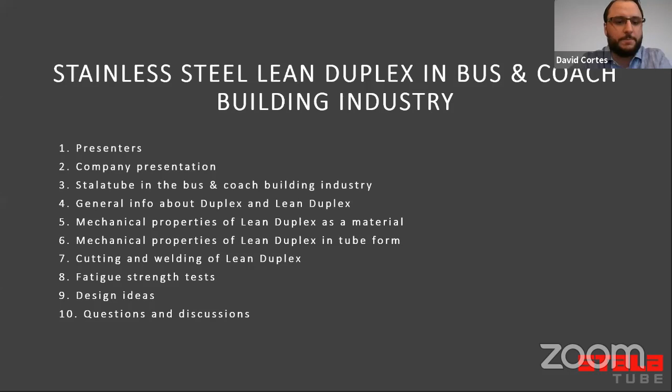So I have been recently appointed export manager in Stalatube, and I have 8 years of commercial experience in the transport industry. My colleague Lari Brask is our welding material expert here in Stalatube. He has also been working in Stalatube for many years. Markus Härkönen is going to be talking about the designing, and he has also experience here in Stalatube for a couple of years.

So Stalatube in short, here you can see where we are placed in the world. We are a company from Finland. We started in '72, actually making kitchen desks in stainless steel, and then this company started to make these square tubes for these kitchens, and then they separated the company as Stalatube itself because the demand started to go up, and they made this strategic decision.

During all this time, we have had for a very long time a commercial office in Holland. And nowadays we have expanded; we have been in USA and in India since 2009. So we have Tushar Patil in India, who can also talk with you about any of your questions directly there in your country. We also have a commercial office in Germany, and we are actually opening a stock in China this year, so hopefully it will be operative soon.

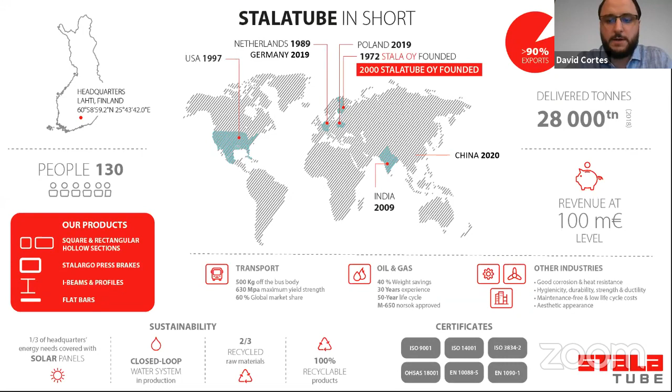These are our main products. So we have mostly square and rectangular tubes in various sizes. We actually have the widest range of sizes in the industry. In stainless steel, everything. And then we have ferritic and duplex tubes, which are the ones that we sell mostly in the transport industry.

We do also laser cut components, as you will see, and we can tailor our products to 1 millimeter precision. So we usually do all kinds of special projects for our customers, and that's where our strength is, mostly in special projects and also in some bulk products, but especially the tailored ones. We have I-beams, we have also U profiles, L profiles. We do sell some sheets in ferritic and duplex materials also. So feel free to make any requests.

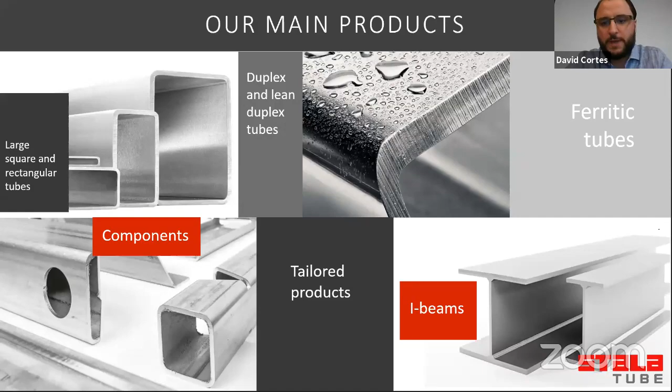Let me show you some of our references in the bus industry. We are the 3rd steel rectangular pipe manufacturer in the world, but in terms of volume, we are the 1st one in the transport industry. So that's very relevant. We are working with the biggest customers. Also with duplex. So companies like Volvo, Scania, VDL, or Solaris are using duplex.

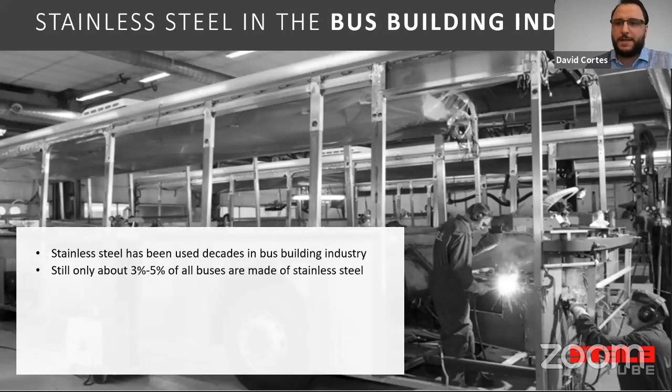Let me talk some history about stainless steel. It has been used for decades in the bus building industry. Many don't know this. Volvo was already in the 80s using stainless steel in their buses, but still only about 3 to 5% of all buses are made of stainless steel. So there is a lot of space to grow that way.

Nowadays, it is mainly ferritic EN 1.4003 stainless steel, the one that we use. But in the US, for historical reasons, coach builders are also using 304 austenitic stainless steel. Due to weight savings, high strength Lean Duplex stainless steel is getting more and more popular.

And actually, one of the trends that we are seeing is that customers are coming from using aluminum, looking for weight savings. They are now coming to us to use Duplex in their new projects, and we are seeing results already. So that is one big trend that we are seeing at the moment.

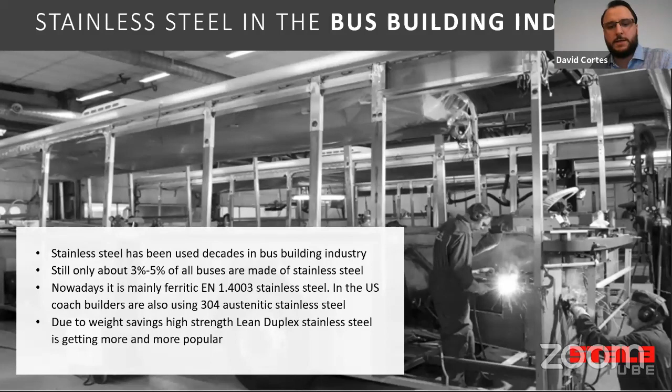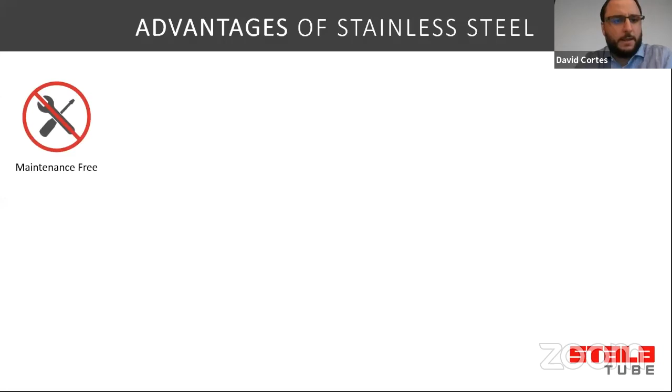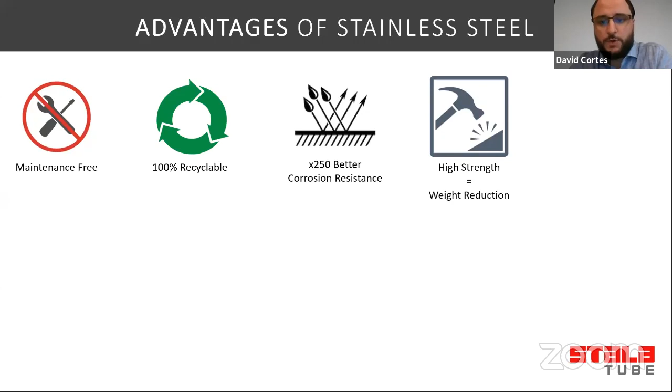Let me talk quickly about the advantages of stainless steel. You maybe know stainless steel as a material, but one of the main reasons is it is 100% recyclable. It has a much better corrosion resistance than carbon steel. It is high strength, which brings opportunity for weight reduction, as well as the capability to use less material in the wall thicknesses. That brings weight reduction.

We can achieve lower life cycle costs by using stainless steel. And it has a really good energy absorption percentage compared to carbon steel. We can do custom-made tubes, and it has great versatility, superior elongation, and a longer-lasting attractive finish without any surface treatments. So those are advantages of the material.

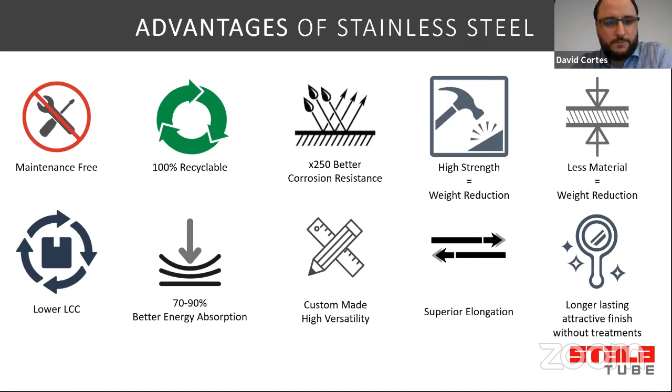Then, the materials that we are using in the transport industry are mostly three, as I mentioned already. So we have austenitic, which is used mostly, as I mentioned, in the US for historical reasons. And honestly, we do not recommend using it. It is expensive due to the high alloy content, and its mechanical properties are not that great compared to other options available. Yield strength, though, is up to 350 megapascals with our Stala 350 material class.

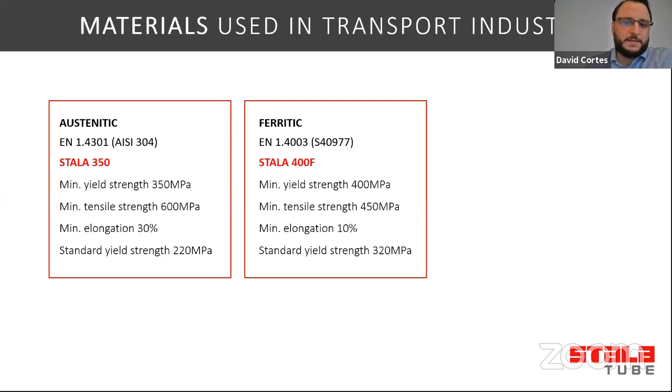So that is there. Ferritic material is the most commonly used stainless steel in the bus construction industry. It has 250 times better corrosion resistance than traditional mild carbon steel. It is cheaper than austenitic, and mechanical properties are pretty good. I mean, the content of nickel is very low, so that also allows us to have a very stable price that doesn't fluctuate as much as it does with austenitic because of the nickel.

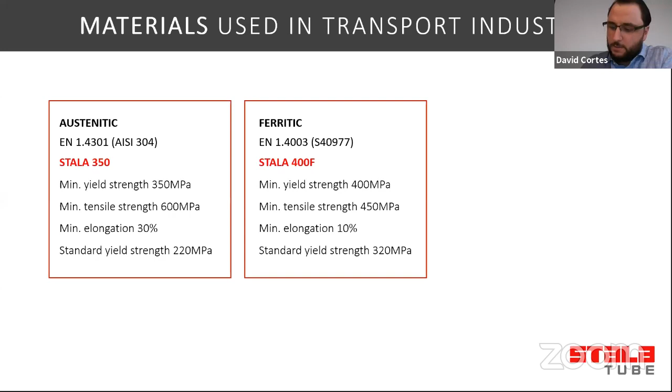Then we do have a yield strength up to 400 megapascals, which is already better than austenitic. So it's cheaper and it has more yield strength. And with our class Stala 400F, we can give you those 400 megapascals.

And then the reason for this webinar is to introduce this Lean Duplex material that we have been marketing already for a while, which is now taking over for new projects. It has excellent mechanical properties. Our customers use it mostly for the side pillars and for heavier beams on the body structure that withstand the highest loads in the bus body.

We can offer up to a 630 megapascal yield strength, which is much bigger than the others, having still a very good elongation, 20%. And it is our class Stala 630D, the product that gives this 630 megapascal. Standard yield strength in all the materials is a bit lower than the one that we offer also in tube form.

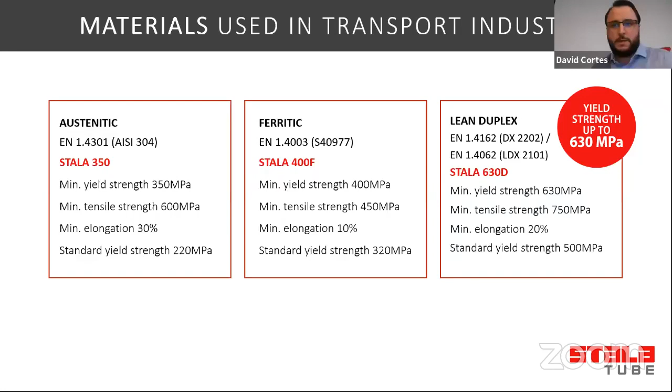And another advantage of the Lean Duplex, because it's a mixture of austenitic and ferritic, it actually also has a smaller content in nickel, which stabilizes the price. So that is also one of the advantages.

Let me show you one component case that we do for Scania. We do this in Europe mostly for factories that they have in Poland and Finland, which are also where we have our own factories. So it is very easy for us to handle logistics. But we are using here duplex stainless steel as well as ferritic. And we are doing tailored solutions, laser cut, ready-made and packed components for final assembly.

So by doing this, we are making it very easy for the final assembly employees in our customers' factories. They don't need such a skilled workforce, and it's very practical for them. So in their case, it works very well, and we are here mostly in Europe, price competitive. Maybe in India this way we are not so much, of course, coming from Europe, but you can see here an example of what we are doing with other customers.

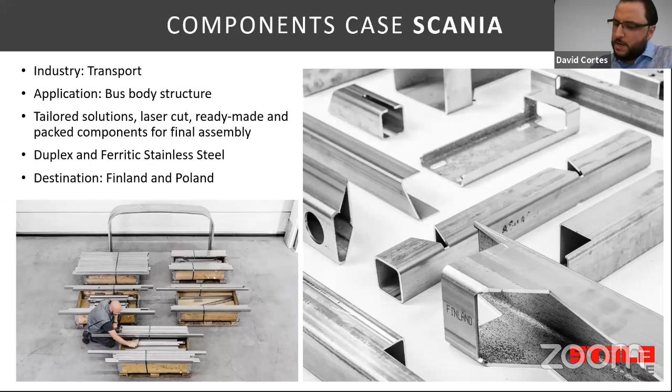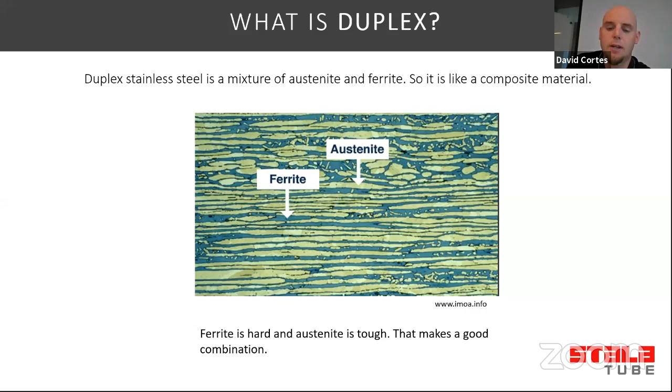And something about the history of duplex, how did this start? Duplex stainless steel has been used almost 100 years. In the beginning, they were used mainly in castings. The reason for that was to avoid hot cracking, because the standard material was fully austenitic stainless steel, which is very prone to hot cracking. The main application was the oil and gas industry, typically valves. Different kinds of valve bodies were cast products.

Using duplex in other products than castings became more common in the 1970s when the steel refining process had improved enough. And the first commonly recognized duplex grade was established. That grade was duplex 2205. It is still the most common duplex grade in the world, and that 2205 is kind of the standard duplex still today. After that, more corrosion resistant duplex grades called super duplex grades have been developed.

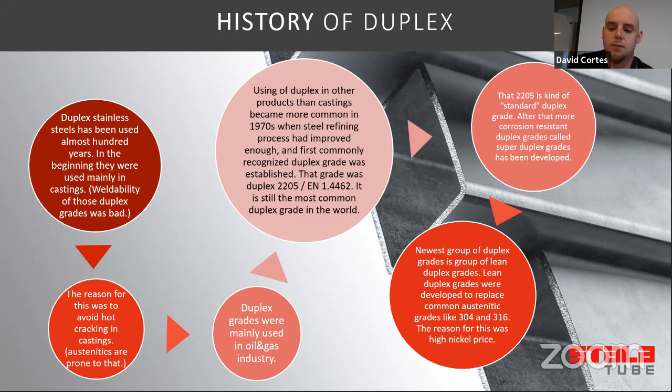Now the newest group of duplex grades is called Lean Duplex grades. These were developed to replace common austenitic grades like 304 and 316. The reason for that was the high nickel price around 2007-8, when the nickel price was sky high. The problem with the common austenitic grades is this high nickel content, which causes prices to fluctuate. These Lean Duplex grades typically have about 2% nickel, which gives much better price stability.

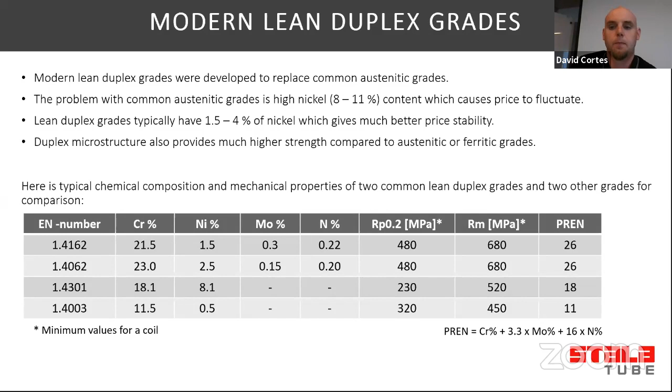And these properties provide excellent resistance in case of crash. So there is a lot of built-in safety factor in case of a rollover accident, for example. This is something that high-strength carbon steels don't have. They typically have very high strength but poor elongation. So in case of crash, there is a risk of cracking.

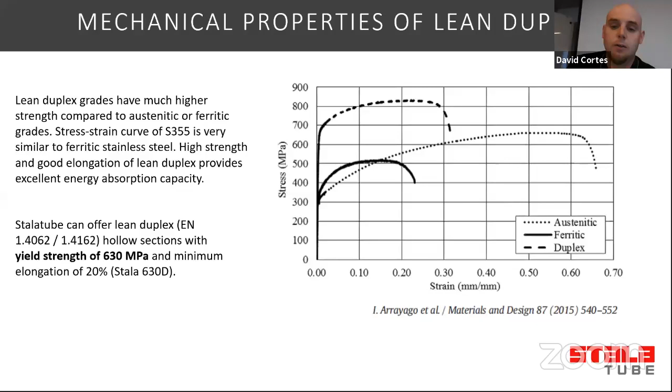Then something about the Lean Duplex hollow sections. So these products offer the possibility to reduce weight compared to ferritic and austenitic stainless steel grades, and this also includes the common carbon steel grades. The corrosion resistance is much better compared to ferritic stainless steel, and this also concerns the austenitic stainless steel. This Lean Duplex has better corrosion resistance than 304.

And this high strength and good elongation makes Lean Duplex an ideal material for rollover structures in a bus body. So that is the main reason why these Lean Duplex grades are being used in bus bodies. And nowadays, the weldability of these modern Lean Duplex grades is also very good, because some of those older duplex grades were very difficult to weld.

And then we have the product range for those duplex hollow sections. The sizes start from 25 by 25 and go up to 100 by 100. And most of those dimensions are available in this high strength class 630D. Custom sizes are also available.

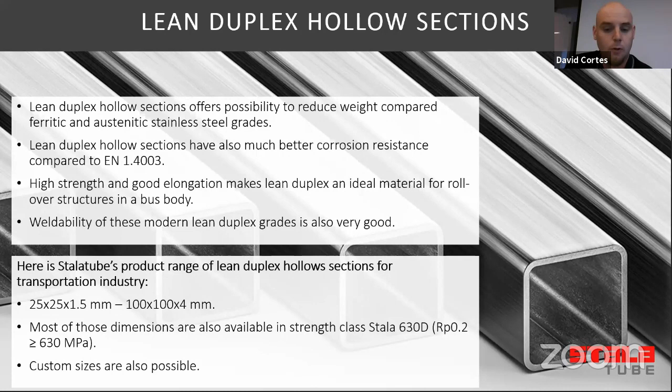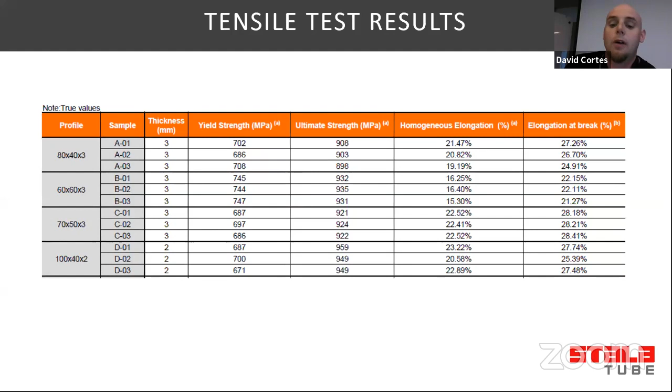Here we have some actual tensile test results for those hollow sections. You can see the profile size on the left-hand side. Typically, as you can see, the yield strength is around 700 megapascals. The ultimate tensile strength is more than 900. And still the homogeneous elongation is about 20%, and the elongation at break is always above 20%, typically about 25%. So this basically means that these can handle a lot of bending, buckling, all kinds of damage before they break.

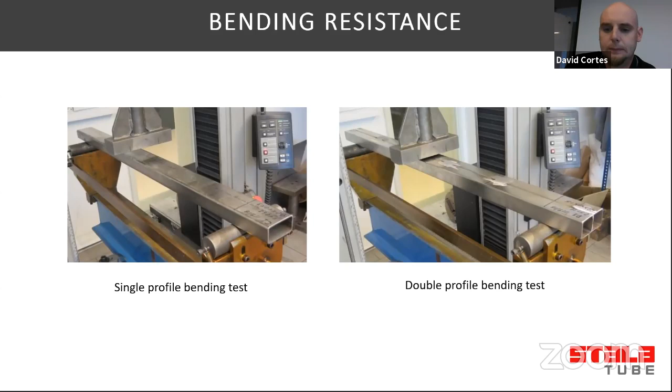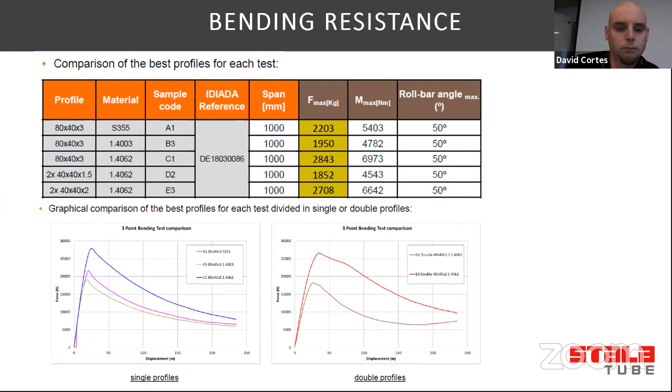Then something about cutting and welding of those Lean Duplex products. Lean Duplex hollow sections can be cut by conventional band and circular saws. High strength of the material may require some special type of saw blade. Stalatube recommends laser cutting to achieve better quality and special shapes, as you saw from the components we are supplying.

Then Lean Duplex can be welded with all conventional welding processes. For bus and coach manufacturing, Stalatube recommends pulsed arc MAG welding. A common welding wire that can be used is ER309LSi. It is an austenitic wire, so it can be used also for dissimilar welds, if we have to weld together Lean Duplex and carbon steel or Lean Duplex and ferritic stainless steel.

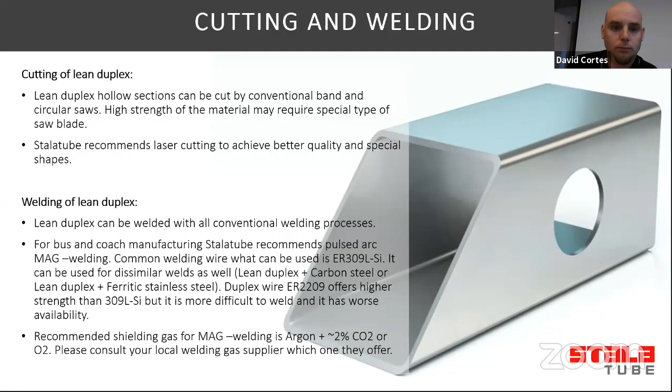Duplex wire ER2209 is also available. It offers higher strength than the austenitic wire, but it is a little bit more difficult to weld and it has much worse availability. And the recommended shielding gas is argon plus 2% of CO2 or O2. Then we will continue with the fatigue test results.

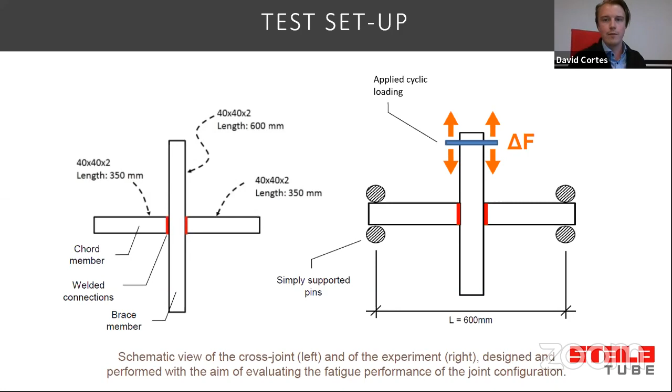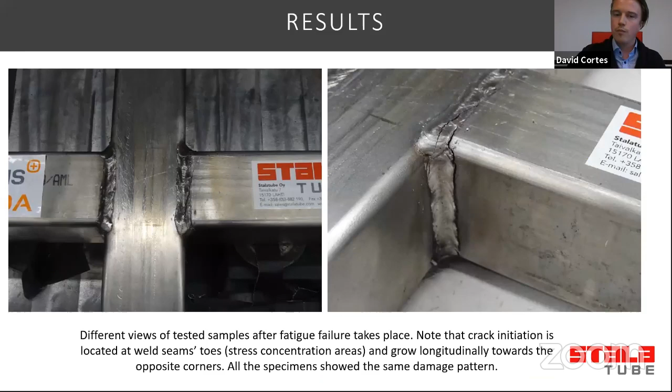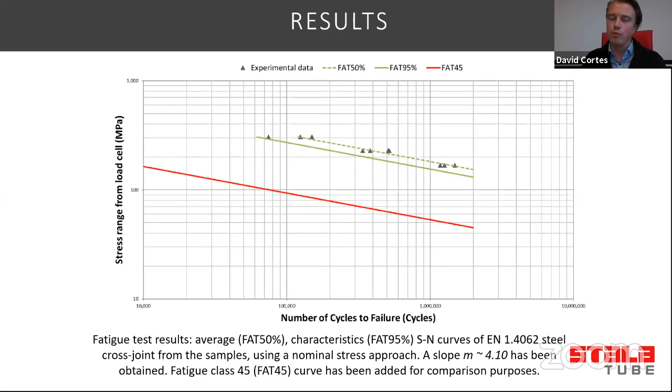So what are the design differences with Lean Duplex? We have a material with good elongation, high strength, and good corrosion resistance. So how and where do we use it? We know that we haven't designed a bus, but we know some cases that are difficulties when designing lighter and lighter structures. So those are rollover requirements and fatigue of joints.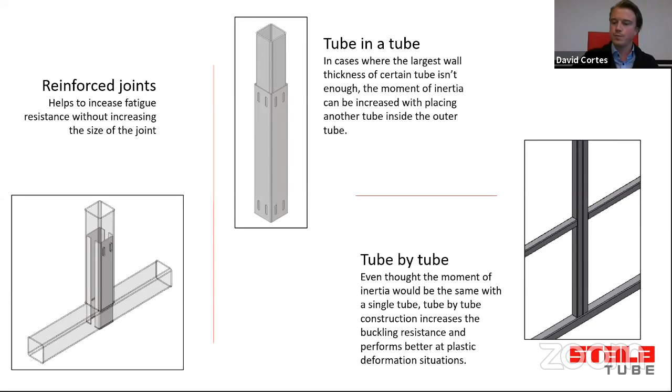And also the tube by tube situation is good, as Lari mentioned, because it increases the buckling resistance of the bus, and the other tube supports each other in case of bending. By the way, the tube in a tube situation is good for Stalatube tubes because we can make tailor-made sizes for the tubes. And lastly, of course, because we have great corrosion resistance, we don't need to make notch holes for hot dip galvanizing of the structures.

So there are some design differences between carbon steel and Lean Duplex, that you can think about how to reinforce the joints and avoid the fatigue when you are using thinner material.

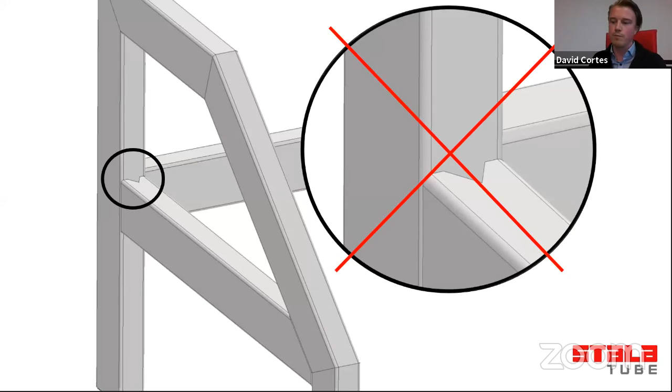Okay, thank you. So, well, I just wanted to mention that the fatigue tests that Markus was talking about were made in IDIADA, in one of the most prestigious European laboratories. So it's not something that we have just done here in-house, but in a certified laboratory.